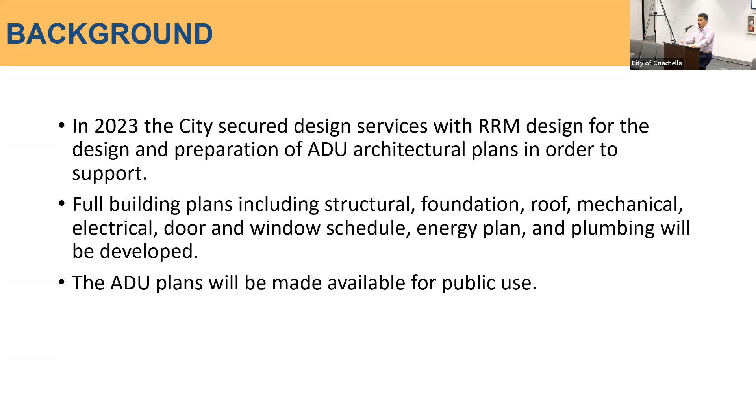What this does is make plans available for the public to construct ADUs on their property. If you're not familiar with accessory dwelling units, basically it's the second unit in addition to your primary unit. Sometimes it's an attractive option pursued by residents because it's a cheaper alternative to housing, but it's also a way to supplement income for primary residential owners. But considering how prices have increased over the last few years, ADUs can now be kind of expensive to construct.

So the purpose of this was to create plans, because design services are often very expensive. If you can cut out the design service cost and allow residents to use their money to pay for construction, it makes it easier for these ADUs to be built. That was the purpose. So what we needed to do is establish what those ADU plans would look like for public use. Staff released an RFP, and our recommendation was that it address detached ADUs, because we believe that's what's typically done.

It's very difficult to do that for a converted ADU, and I'll go into what that is in a little bit. We also pursued a conversion of a garage, since we do allow that for ADUs. So in order to provide good parameters for design for the public, we want to make sure that it looks good when completed.

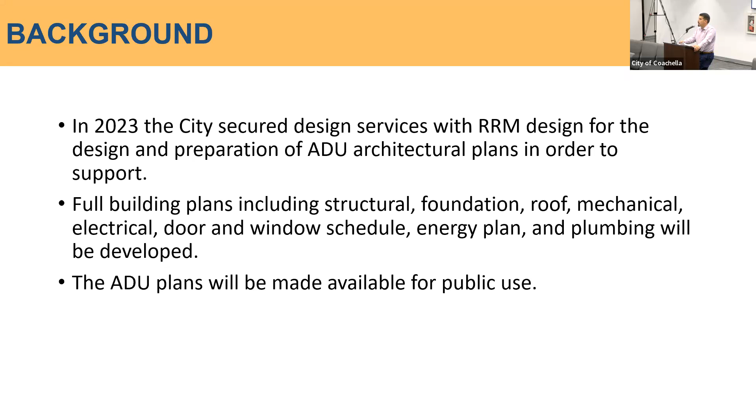Going back, there were 5 plans proposed as detached dwelling units in the plan set provided in your staff report, and one that's a converted garage prototype. The ADU plan size range is from 480 square feet to 1,000 square feet, with the converted garage being a typical size, though it could be customized. It would be for a 2-car garage, which would be 400 square feet.

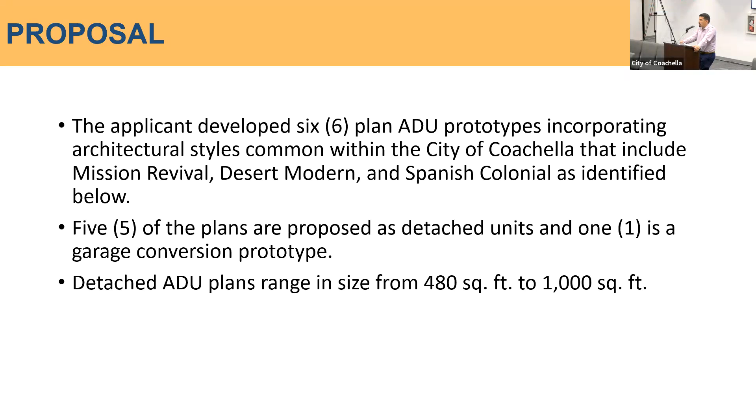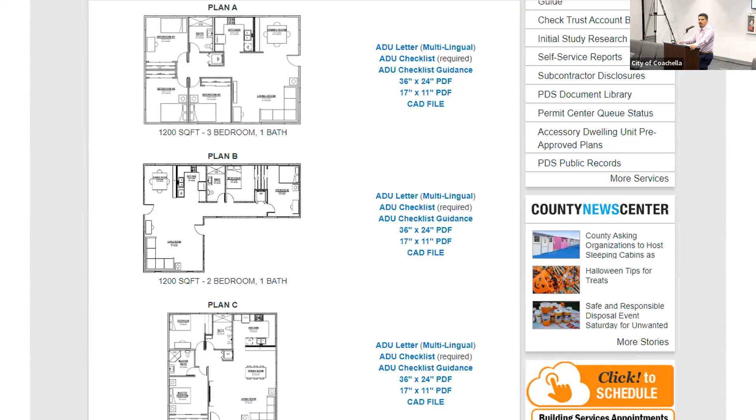This image gives you an idea of how other cities and jurisdictions have implemented this. This is not the first time a city has done this; other cities have done this to increase housing production. This is San Diego County. They have a website with pre-approved plans available for the public, an easy streamlined website. We would want to try to do something like this when we approve these plans and make them available for the public. You can see the links provided that allow people to download the plans, which also include a CAD file, so a designer can pull that file, customize it for the property owner's lot, and submit it to the city.

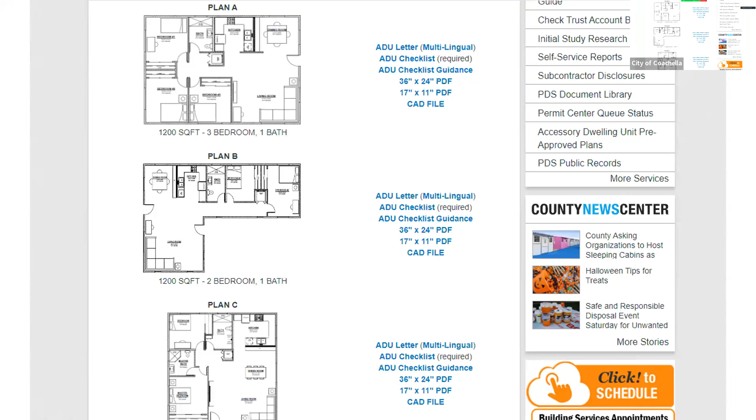Going to what we actually did here for the city of Coachella, what we wanted to keep in mind was cost. When I looked at the Desert Hot Springs example, some of the prototypes looked pretty costly, and I think what we're trying to achieve is quality design, but at the same time affordability in the construction of these units.

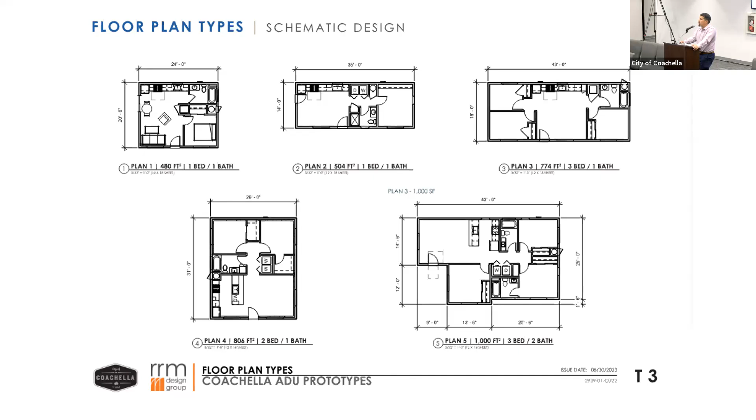So these are the different floor types for the detached units. Again, the size range is 480 square feet to 1,000. Under state law, ADUs could be constructed as detached units up to 1,200 square feet. In this case, we capped it for this design at 1,000 square feet, which could actually fit 3 bedrooms. But we'll go into each of those plans after this slide.

Plan 1 is a 1-bedroom unit, 480 square feet with 1 bath, living room combined with a kitchen and also the dining combined. It's a simple structure with the main entrance and simple kitchen.

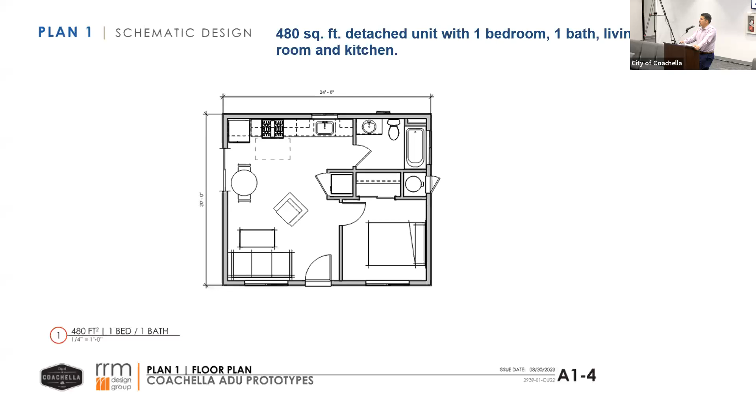In terms of the architectural elevations, there were 3 architectural elevations common through all the plans prepared. The architect looked at the different architectural styles in the city. Most of them are kind of like the red tile roof and Spanish colonial design. We do have some that are modern - if you're familiar with those homes that look like Santa Fe homes off of Avenue 49, that's an example of a more modern design. We anticipate we would get more modern designs in the future; the recent Sevilla 2 has a modern design plan type.

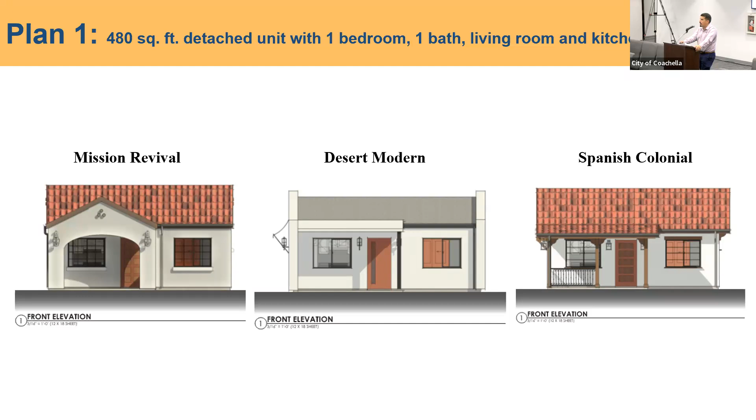This is what the elevations would look like for plan 1. We thought it's pretty attractive. What the designer also included is a patio in the front. Obviously we know what the weather conditions are like, so it's good to have a patio to be sheltered and be able to go outside during the heat.

Looking at the first elevation, the Mission Revival - here's the floor plan again, each floor plan is slightly different for each of the different elevations. You could see what it would look like, and there's a perspective rendering with a red tile roof and patio structure, but very simple design - 2 windows in the front, and the main entrance is covered.

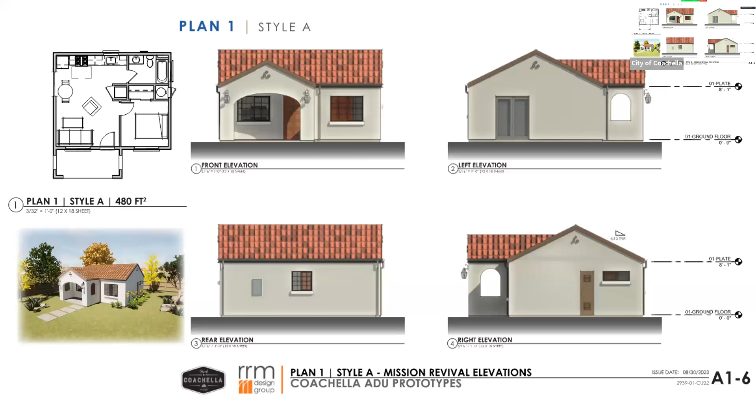For plan 1, but the desert modern design, this is what the structure would look like. It still does have a sloping roof, and I'll go into that a little because one of my recommendations is maybe to have more of a flat roof - I'll want to get planning commission comments on that. This would also include a patio in the front and a covered entryway.

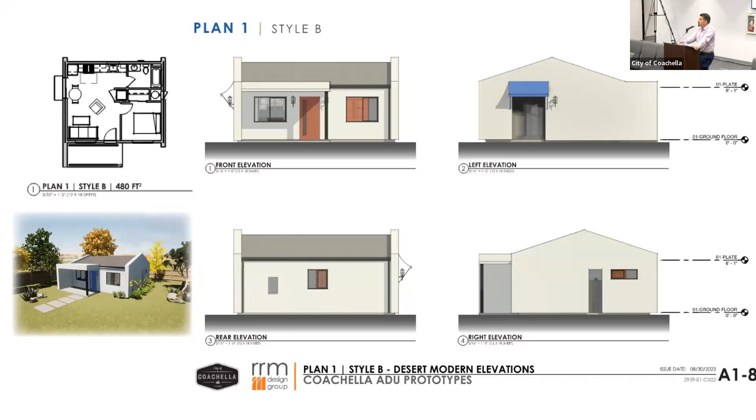The next design would be a Spanish colonial design. This would also have a front patio, but designed a little different than the first Spanish design I showed you. It has a red tile roof, and more windows featuring divided lights, common with this architectural design, but a little more ornate than the first one.

If you look at the design, you might not be able to see the plate height. The plate height, which is kind of like your ceiling height, is 8 feet 1 inch. We thought that makes sense and keeps it affordable, instead of trying to achieve high ceilings, which is more expensive to do.

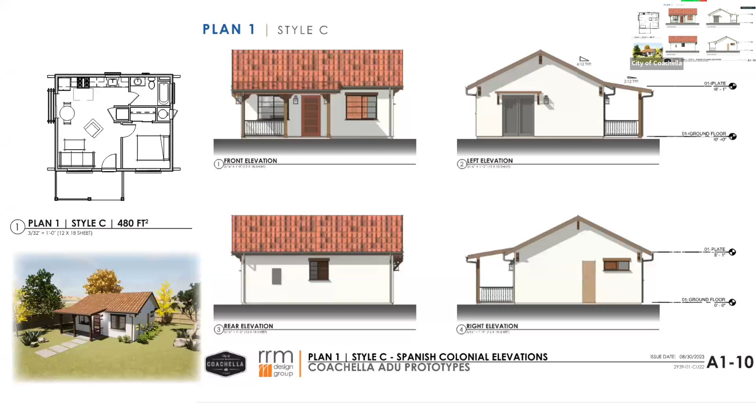Plan 2, this design is 504 square feet. This would also be a detached unit. It's a bit more of a linear, narrow design, but we have to also think about the backyards for people's homes, and what would actually fit. This would allow something to fit in a smaller setback rear yard, or potentially a side yard.

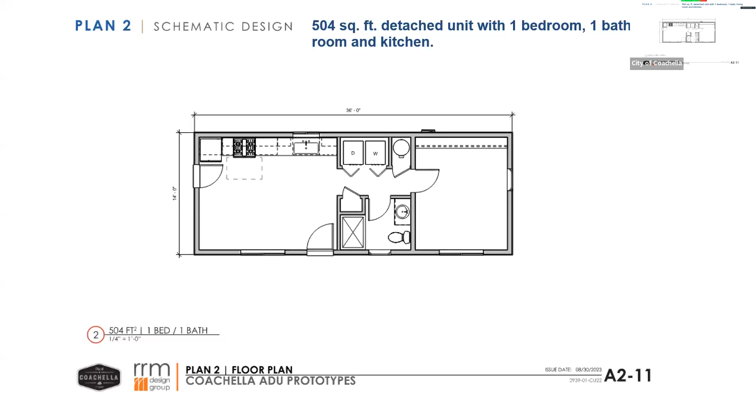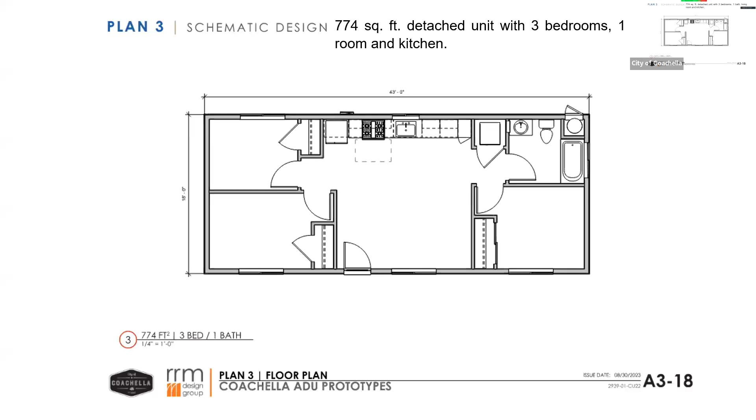Sorry, let me go back to the floor plan. So with this floor plan, it's 774 square feet, but it also accommodates 3 bedrooms with this design. I didn't think that could be achieved with the 774 square foot design, but it also includes the kitchen area combined with the living room and dining room.

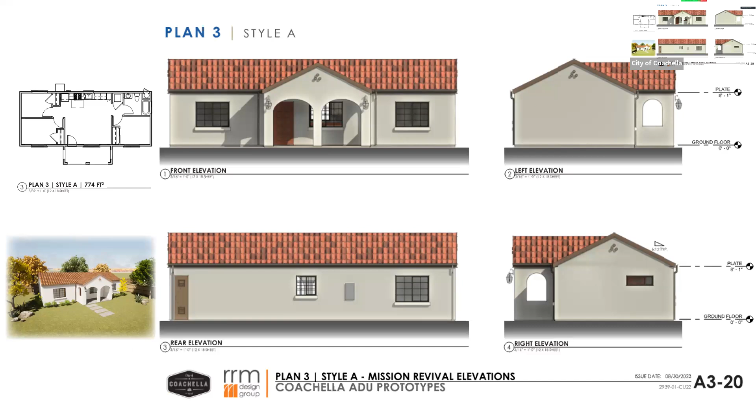So the first one is the Mission Revival. Again, this is more of the linear design, but it still has a front patio and the red tile roof, 3 windows in the front, and a covered entryway.

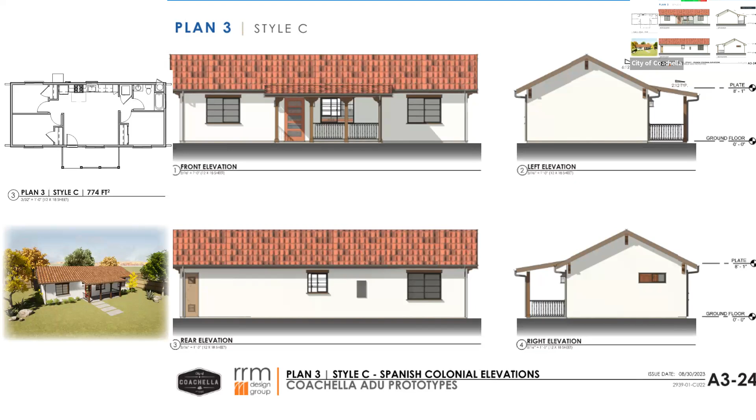The Desert Modern design has a sloped roof design, but it's a little more streamlined in the way the structure is designed. Last is the Spanish Colonial Revival design, which is a bit more ornate in terms of the patio and the windows.

Plan 4 is shown here, and this is similar to the original box design, but a little larger, 806 square feet, and it's a detached unit as well. This one has 2 bedrooms, and a kitchen combined with a living room, a bathroom, and the washer and dryer in a closet.

This one has a bedroom with a walk-in closet option. Some of the other designs did not have walk-in closets, just a sliding door option.

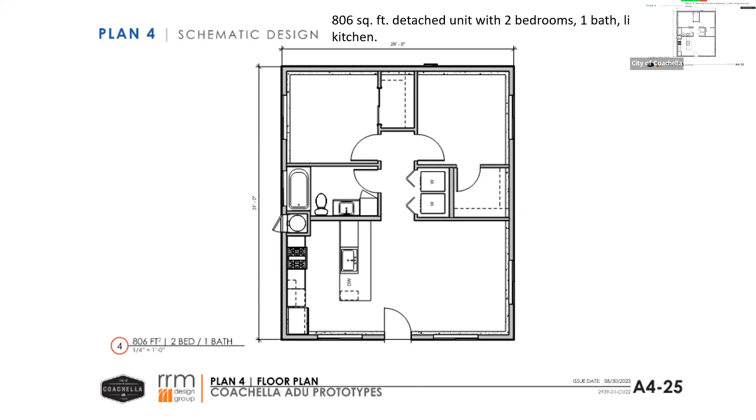These are the 3 design types we've talked about, but pretty attractive. In this one, you can see with Plan 4, it does include a Desert Modern design with more of a flat roof. In my opinion, the flat roof is a little more attractive for the Desert Modern design, so we'll want to get your feedback there.

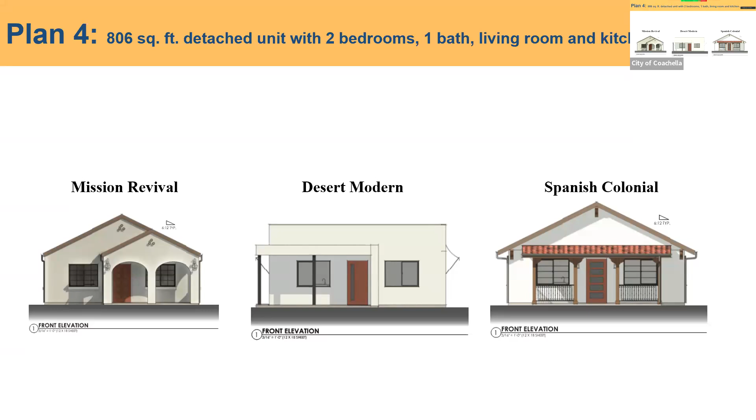Here's Plan 4 for the Mission Revival design. Again, it has a covered patio entrance, and it has the gable roof design in the front, with a red tile roof.

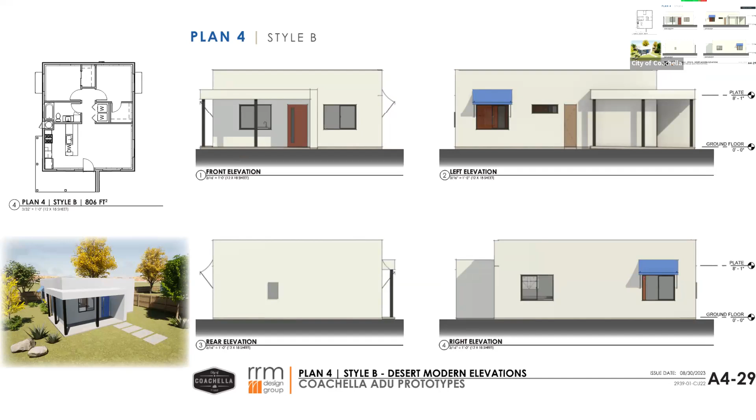Plan 4 for the Desert Modern has that streamlined look I mentioned, more of a flat roof design than the previous plans. Then the last one for Plan 4 is the Spanish Colonial.

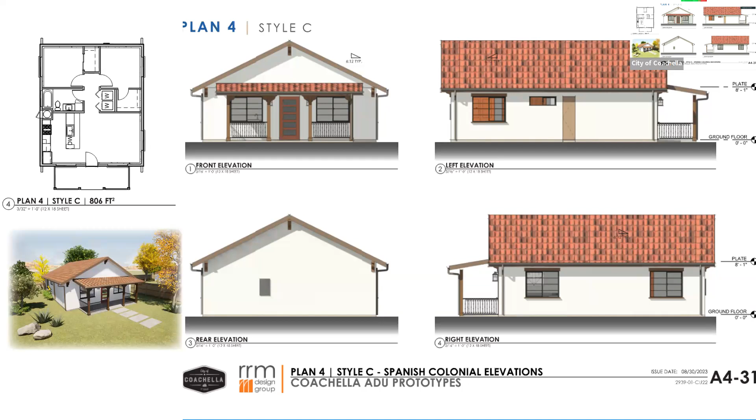It has the gable roof, but the patio is a little different than the first design. I thought it was a bit awkward in terms of how the gable roof of the overall building interfaces with the canopy, so we'll go into that at the end, but I wanted to get Planning Commission's thoughts on how that could be improved. This would actually be the more ornate design, with how the patio is designed, the railing, and the windows.

Plan 5, this is the 1,000 square foot unit, and it's a 3-bedroom unit.

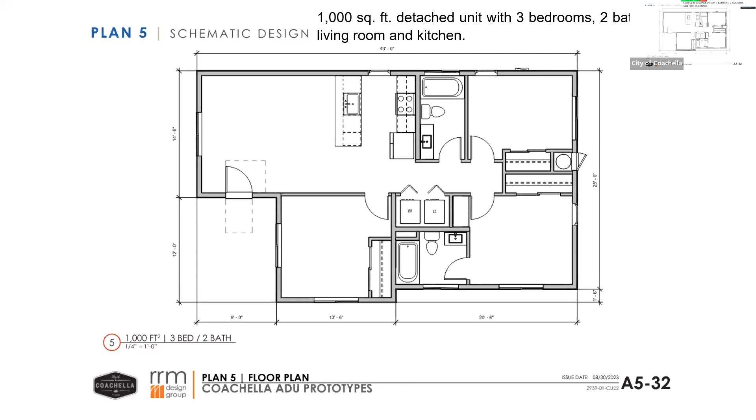This would have no walk-in closets like one of the previous designs, but it does have a large living room area and a kitchen with a bar, and the washer and dryer would be in a closet, but it would have 2 bathrooms in this design.

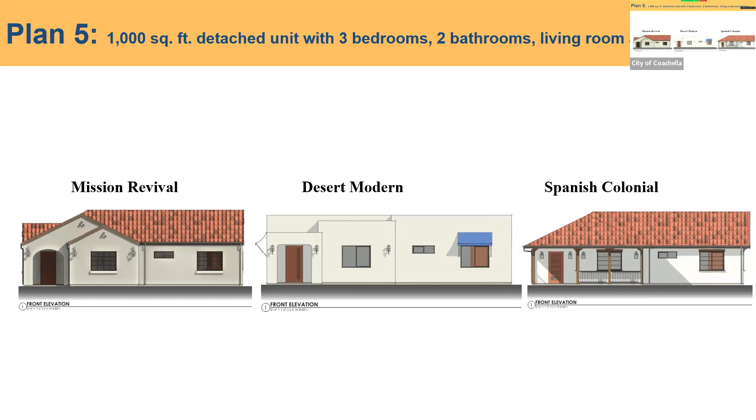So these are the 3 different elevation plans. Again, with the Desert Modern design, it has a flat roof design with this one. This is more of a narrow design project, so that considering it's 1,000 square feet, it fits in the backyard.

The Mission Revival design has a lot of variation in the way the roof is designed, so it's pretty attractive in how they've accommodated that. This also has a small patio and a covered entry.

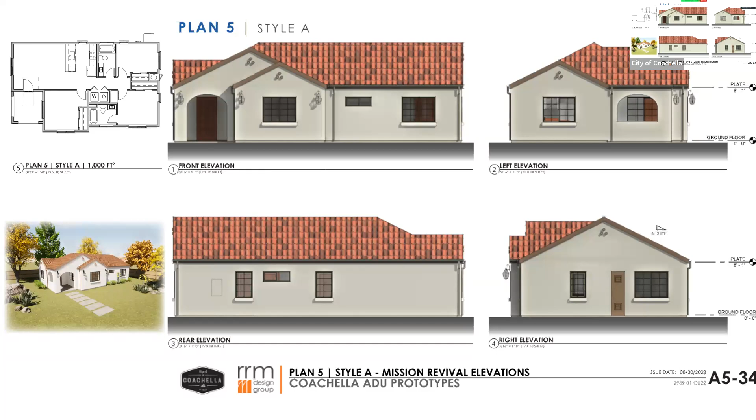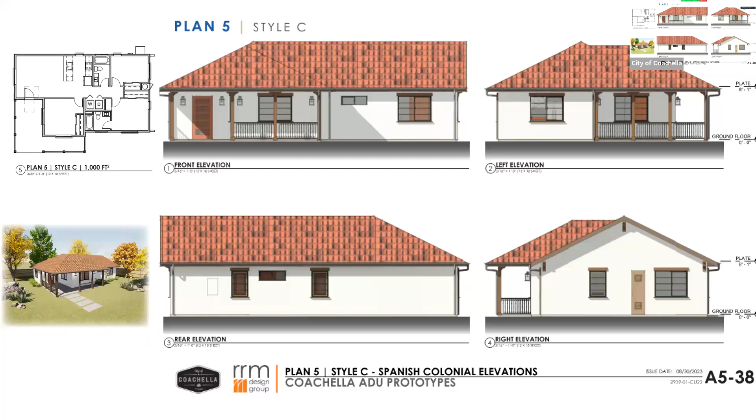And the last is the Spanish Colonial. Again, attractive design, not as much variation in the roof design as the original Spanish architecture, but it does have a lot of design features with the railing and post for the patio. This actually has a bigger patio than the other two elevations.

So the last one is the Plan 6. I don't have a colored elevation to show you, but this is for the garage conversion. The assumption is that a 2-car garage would be about 400 square feet. Not everyone's 2-car garage is exactly 400 square feet, so the design would need to be customized for each person's garage, but this would be the typical design. How do you make a garage conversion work?

This is a little bit more attractive than the typical designs we've seen come in. Sometimes they're not as attractive, and it's kind of hard to do that with the garage sometimes. So this was the designer's attempt to improve on some of the design we can get for a converted garage.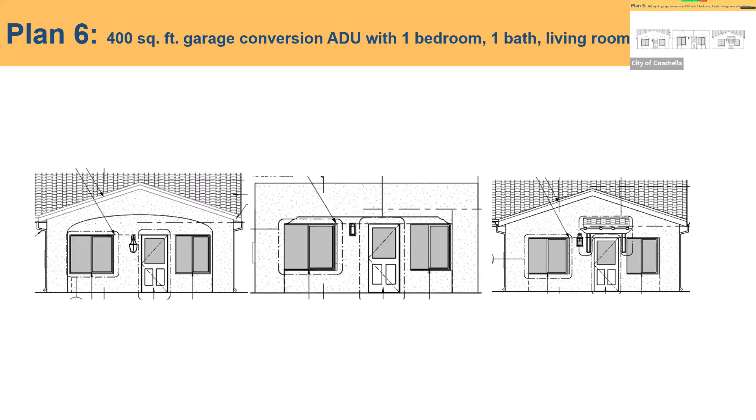In terms of some of the design revisions, I actually think what the architect prepared is good design. I would be a little apprehensive about increasing the architectural features too much, just to make sure it's affordable for someone. That's the purpose of this—to allow someone to want to use these plans and to also increase housing in the city of Coachella.

But for the modern design, I kind of thought that maybe the slope design isn't the best look for a modern designed unit. I did like the features where it was more of a flat roof. But I'm not absolutely opposed to this, so I want to present that before the planning commission.

I'm going to go into the other suggestions. I thought, maybe do we want to have the patios as an option, or do we want to make sure it's an integral part of the design? Some of the ADU designs we see don't include a covered structure, so that's a question for the planning commission.

With this design, it looked like these two plans, the Plan 3 Mission Revival and the Plan 4 Mission Revival, the patio was kind of narrow. It didn't feel like it really allowed for people to gather outside, and it has that post at the entrance that kind of blocks you. But again, what would be the alternative? It does make it look good in the sense where you have the arches in the front.

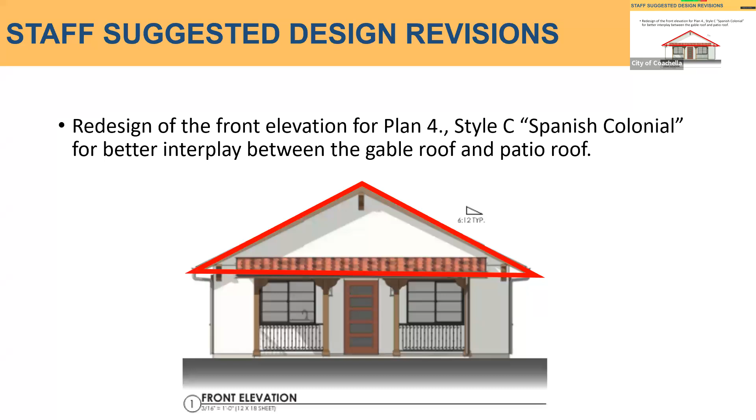And then the last item was to include the patio structures that I mentioned as a design option rather than a requirement. But then again, these would be CAD files, so a designer could remove it from the design, but do we want to provide that up front?

So that's it. Really the purpose of this is to present this first to the planning commission. We're not asking for your approval today, because I want to get back to the architect and allow them to finalize the design before it's brought back to the planning commission. You will be the body that approves these designs. Once that's done, they will work on all the finalized plans, like the plumbing plans, the structural floor plans, the roof plans, everything required for an actual submittal to the city.

So your input here is going to be helpful. I gave you some questions that I want you to weigh in on, but there may be other things you might request.

So I have a couple of comments and questions. Congratulations to staff, right? This is quite an achievement and we are on the right path here. Kudos to you and your staff for having the vision to go down this road.

Secondly, a question would be, what does the fee schedule look like for turning the CAD file over to the owner applicant at that point, and whomever is going to do their drafting?

...accommodation for solar. I don't have big objections to this, but I want to get your feedback on it. I personally like either option A, or having it slanted, but that's just my opinion - it's up to the commission, the team.

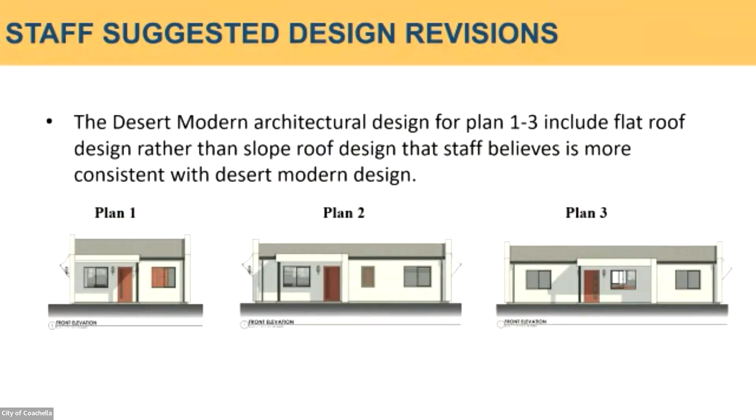Do you want to have an option for the applicant to have either flat, or the other option which does have the slope, right? So if that's something they're considering, if they know they're going to add in solar panels, that's really up to the applicant.

So it doesn't really make a difference for solar? No, it doesn't, because the manufacturer comes and looks at your roof and decides how to install solar regardless. It's just a different installation. There is a cost difference though, depending on how you're building it.

And also, from what I understand, it's more secure if it's slanted because of the way the wind comes, and flat roofs have more maintenance versus slanted roofs. I did research on this - flat roofs allegedly have more maintenance than slanted, that's what I read.

Water could get stuck, and that's why a slope is preferred - people move more towards that preference. But when they build a flat roof, they build it with a slope so the water can drain. They don't build it completely level. It has a slope, it has to have roof drains, even though it's called a flat roof. But according to what I researched and read, that's what the literature indicated.

The mission revival and the colonial Spanish, for instance, like plan 4 style C, Spanish colonial, that has to have a patio, right? When you look at that particular style, that design, that's what makes it look really nice. I mean what are we gonna do, cut the roof line down? So what are our options?

Okay, we can select how many total? No, we can move forward with all of these, right? Okay, more I was looking for, are these designs okay?

Is there something even in the floor plan that doesn't work, that you'd like to see a little different? So it's not just about the exterior, it's also about the floor plan. You know, I like what they did with the floor plan, I think they tried to fit and maximize everything. Yeah, they did good.

That was going back to my question, so this is where I'm a little confused, okay? Commissioner Hernandez shared that a resident of the city takes these blueprints and then goes and talks to a designer to make it fit their area, right? So these are just specs and recommendations, right? At the end of the day, me as an owner, as a resident, I'm gonna design what fits properly into my square footage.

And then have these as recommendations. So if I want a flat roof, I'm gonna get it. At this point, I think it's obsolete to ask an architect to remake these small adjustments when a resident at the end of the day is gonna make the ultimate decision, if that's how they're gonna wanna design it. I think as a city, allowing the resident to have these as blueprints to move forward makes sense.